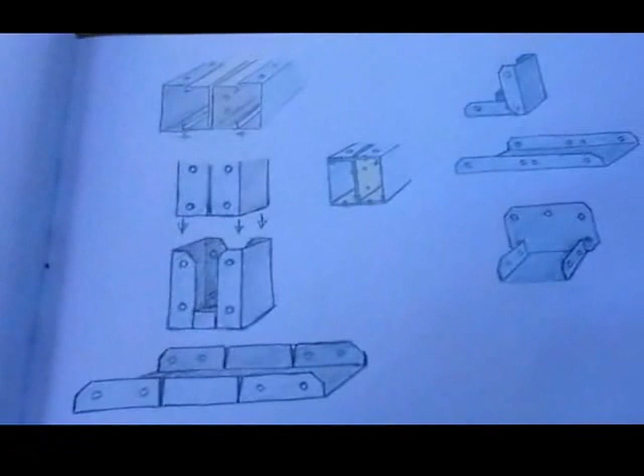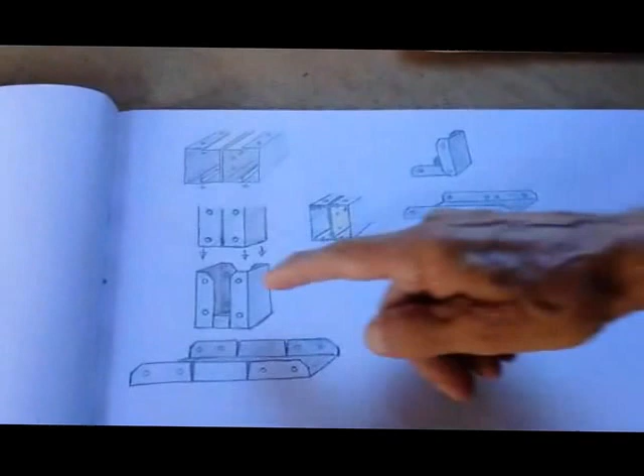So if you look at some of these things that I've made here, this is how I put the metal stud together. This is two lots of stud and two lots of channel, or track as they call it here. And then this is what it looks like when it's all put together. This is what I call a boot, which if you're going to have a beam, one of these standing straight on the ground, it's nice to have this, a boot. And this is how it would be made up. But I'm going to show you how that can be done later.

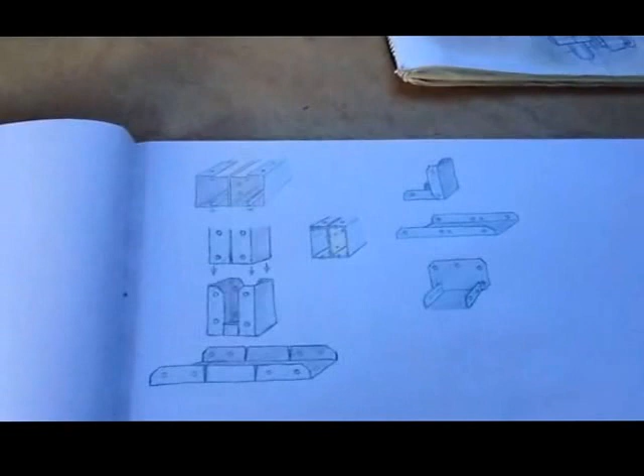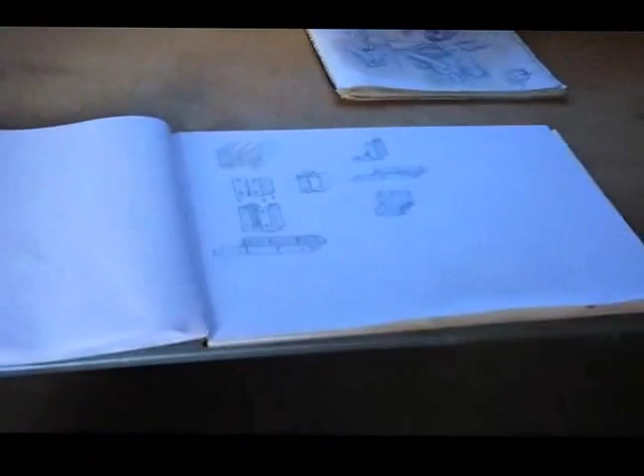Here's some of the other little brackets that I ended up making just by bending track. And in this case, bending one side and then hammering this side out. Right, so let's look at some of the places where the metal stud is still exposed. Here's one place.

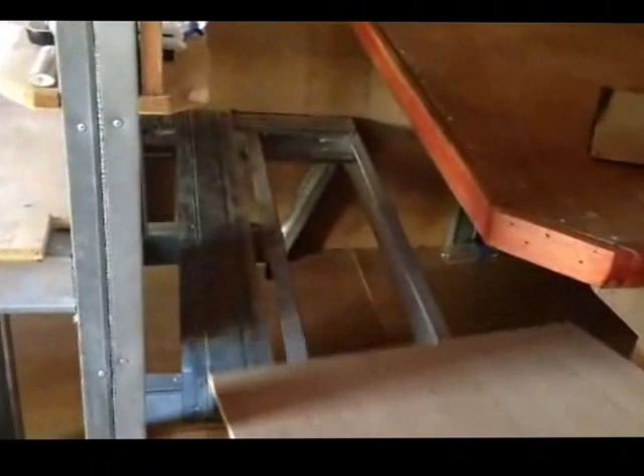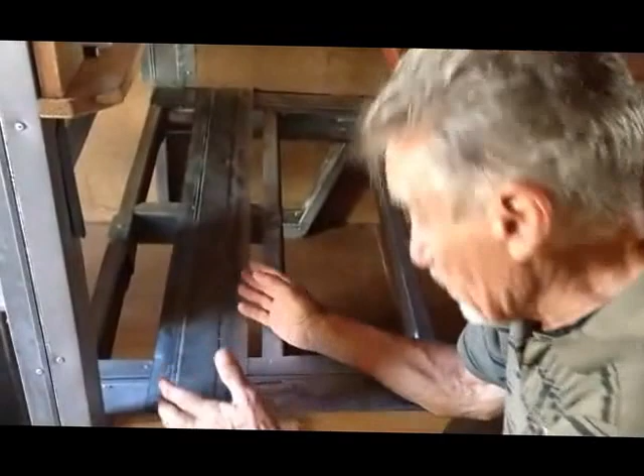We're in the process of putting the house together, but this is one of the places where I made furniture out of metal stud. So this here is track, and it's just hammered out straight, forms a big plate. Track, or channel, I found was the most versatile part of metal stud. It needs the least hammering out, and then you can make all your brackets from that.

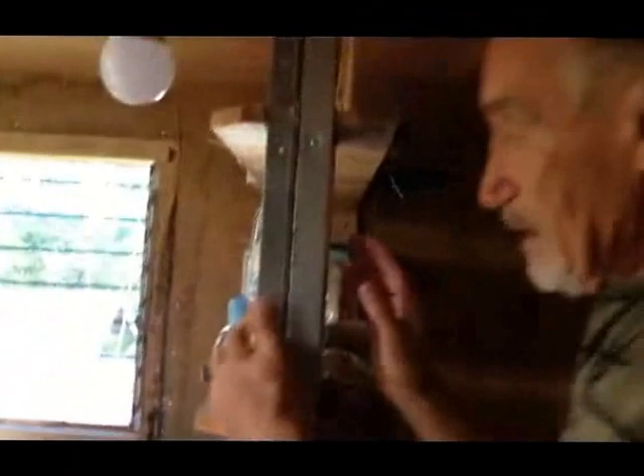But you can see here how all of this goes together. There's a place where a bracket holds this part into this part. This is track, sorry, this is channel stud, and this is the track. And that forms, as you can look down here, that forms the seat. It also forms a support.

This is what I call a beam. This is two pieces of stud, back to back, riveted together, and then the track is placed on the outside, and that's riveted as well. That forms a beam. That's a support beam. At the top, as I said, I've got a boot. At the bottom, you can see here, come and focus in.

I'll show you how to make these, but this is a boot, and it's just track, and it's bent, and it gives a nice footing for the beam to sit on. Those sharp edges are not pressing in. That's one thing there. All of the backing, as you can see here, is made in metal stud, as is this part, which is a mirror image of the one that you've just seen. So that's there. That's not quite so obvious.

I actually made this in metal stud. All of this is made in metal stud. All the base work is done in metal stud. Now, there's a very good reason. Let's go out here where the light is better. So there's a very good reason why I chose metal stud.

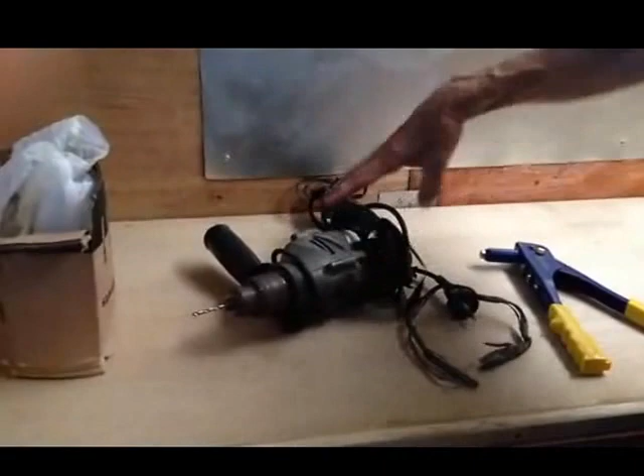So, metal stud is very light. It can be lifted quite easily by me. And I built the house alone. Single-handed, I built the house. And I built it with these very basic tools. If we look now, to do metal stud work, you need an electric drill and a drill bit. You need a riveter, a pop riveter.

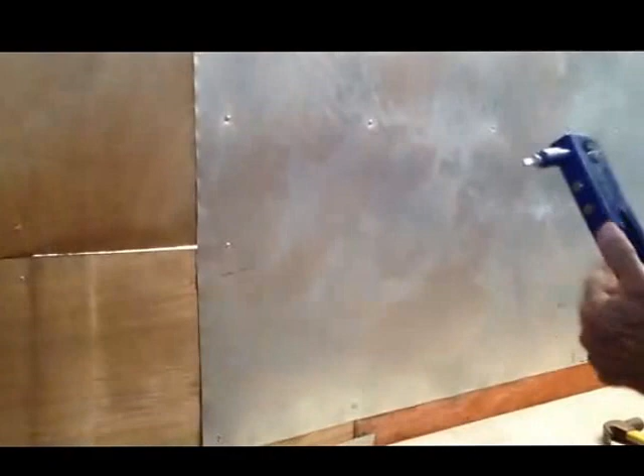And let me see if I can get my hands in here, which is not proving easy. You need rivets. And those rivets go in the gun, or riveter. They go in.

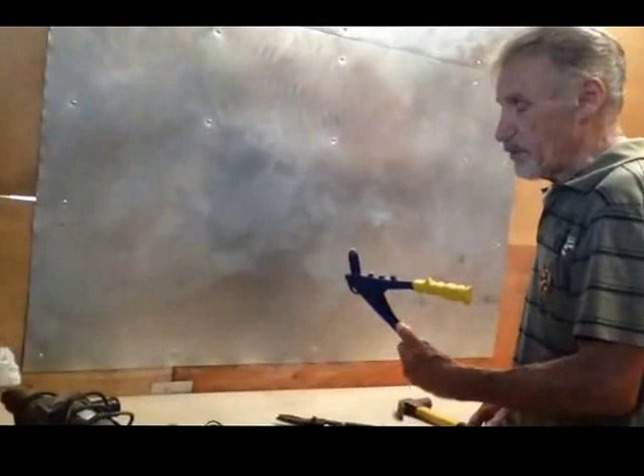And that's what holds it together. You need a pair of tin snips. These are all very cheap, apart from the drill. These are all very cheap materials, tools. This is a $5 tool. They don't last long, so you need to be buying quite a few.

I think I've gone through maybe 10 riveters since I've been building the house. And you need a hammer, of course. Right, so that's what you need there. Now, some of the places where I've used metal stud where it's not normally used. If you look up now, I think I'm going to take the camera.

You can see there where I've used metal for making up these beams. The beams that I described, there they are. That's a boot on the end, and all of these are very strong. They can be doubled up, and then they can actually be plated together, which I think you can see probably about there. Let me see, yes, there's a plate. There's a plate holding it together.

There's another here. You can see another support plate. It's bent out. It can be doubled up. It can be tripled up as many times as you want. Here you can see I've used track to join two beams as they cross, and the same over there. Same over here. So once you actually get the hang of making those brackets, all of this can go together like Lego.

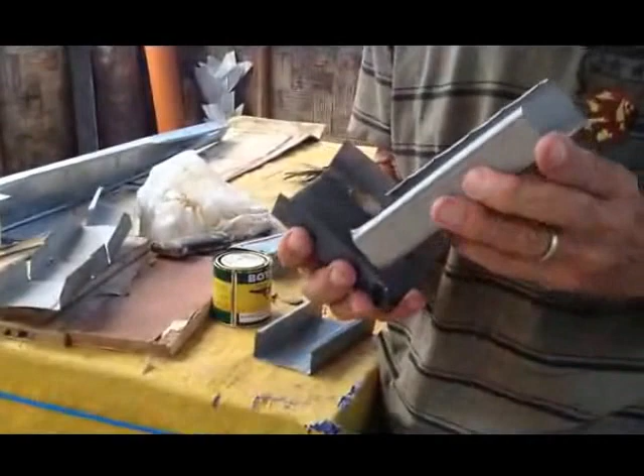And Beth's going to take over the camera. You're going to follow me out to the workshop. So this is what you've seen. This is what you've seen me call a beam. You take the metal stud. This is stud. The metal stud is the one that's curled over on the edges. The track is the one that's made for this to go into.

Now there are many videos on YouTube showing how to do conventional stud work, so there's no need for me to do that, right? So good. So you need to know the basics, obviously, and you can easily learn those. But this is the basic. This is stud, this is track or channel. Now, when you take two of these and put them back to back and rivet them in here like this, you rivet them together.

Now, if you need a beam that is longer than the normal 10-foot length of stud, what you do is you stagger two pieces. And then when the other piece comes in, it will be like that. And then you put one of the brackets that I'll show you how to make. So, we've got the beam started. Here's the two metal stud together. After you've got two metal stud together, you take track. These are just little scraps that I've still got there.

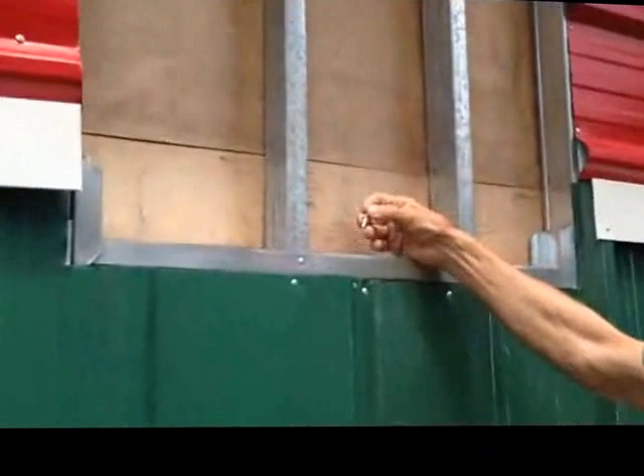Now all of this wall, the walls were all made of metal stud. You can see the beams up there, you can see the boots on the end, if you focus on the beams there. You come here, you can see here how the beams... what a waste, there's a rivet.

So this is actually going to be blocked off. I had intended to put a window in here, but when I started to work on the kitchen, I realized that we wouldn't have any wall space if I kept the windows there. So as much as I would have liked to have had the extra light, I didn't do that. And I put in a plastic roof panel, which has given us all the light that we need. So this will all be put in.

As you can see here, this is actually going to be an overhang coming out quite a long way, out to probably here, to shield that door. Most of the rain that we get, and we get very, very heavy torrential rain out here in the Philippines, seems to come in from this direction, which I think is south. And it seems to come in from over there.

You can even see that if there's anything dark, it's over there on the horizon. So if we're going to get any rain, it will be from over there. So it was important that this should have a fairly sheltered cover, like a kind of a mini porch.

All of this here, as you can see, all of that is metal stud, and at the support places there are beams, and up on the top there are boots. So I practice what I preach. Just one last look. I believe in using the materials that I can get easily. None of it is probably beautiful compared to Western houses, but when you look at the view that we had, then we can be forgiven on those.